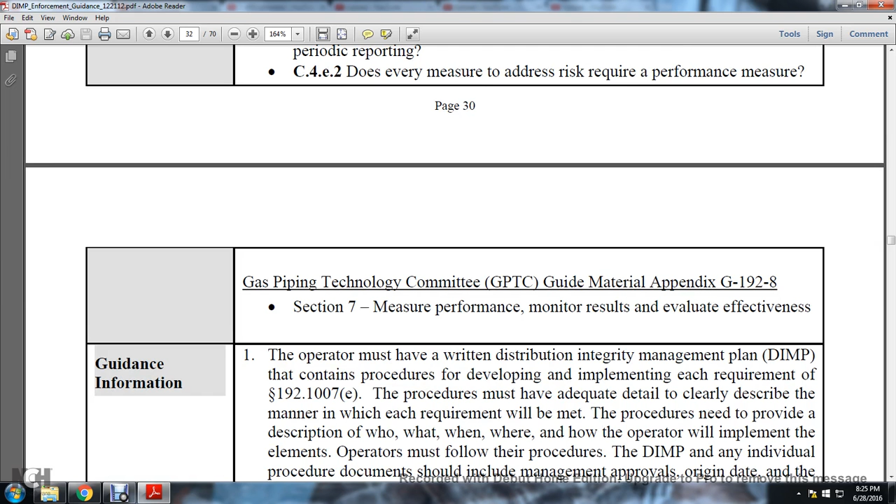Guideline: the Gas Piping Technology Committee, the GPTC Guide Material, Appendix G, 192.8, Section 7: measure performance and monitoring results, evaluate effectiveness.

Guidance information: the operator must have a written distribution integrity management plan that contains procedures for developing and implementing each of the requirements under Statute 192.1007E. The procedure must adequately and clearly describe the manner in which each program requirement will be met.

The procedure must provide a description of who, what, when, where, and how the operator will implement the elements. The operator must follow the procedure of the Distribution Integrity Management Program, and individual procedure documents should include management approvals, origin, and the effective date of the last revision. For additional information, see the guidance section 192.1005.

An operator must have provisions for measuring the integrity management program's effectiveness. The documentation must identify that the measurements are to be reviewed and the frequency at which they are reviewed.

The operator must develop the monitoring of performance from the established baseline to evaluate the effectiveness of the integrity management program. The program documentation must include the process the operator used in establishing the baseline and measurement of each performance measure from which the evaluation of change is made.

The program documentation must specify the measurements to be taken and identify the specific dates the measures should be covered. The threat-specific measure will only apply to the operator who determined the measure is needed to reduce risk. If it is a new performance measure, the operator may have only one data point, and will collect more data in the future to evaluate the change.

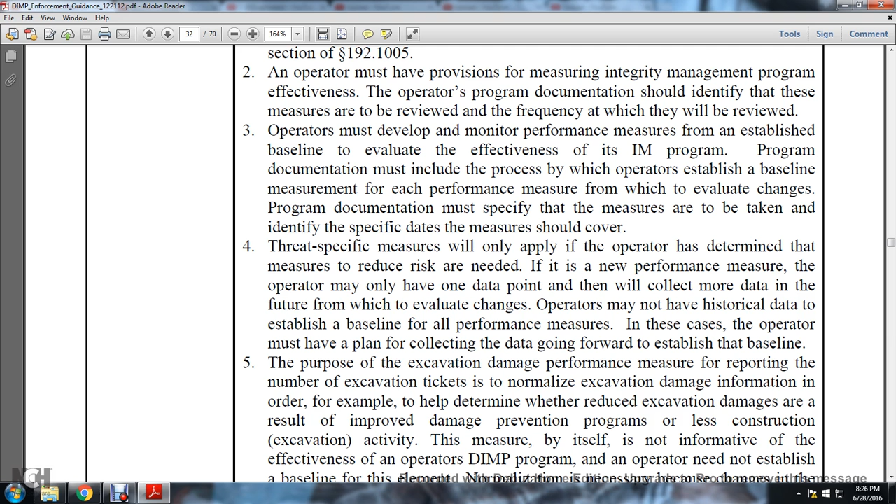The operator may not have historical data to establish the baseline for all performance measures. In those cases, the operator must have a plan for collecting data going forward to establish the baseline.

The purpose of the excavation damage performance measure is the reporting of the number of excavation tickets, in order to normalize the excavation damage information, for example to help determine whether reduced excavation damages are the result of improved damage prevention programs or less construction excavation activity.

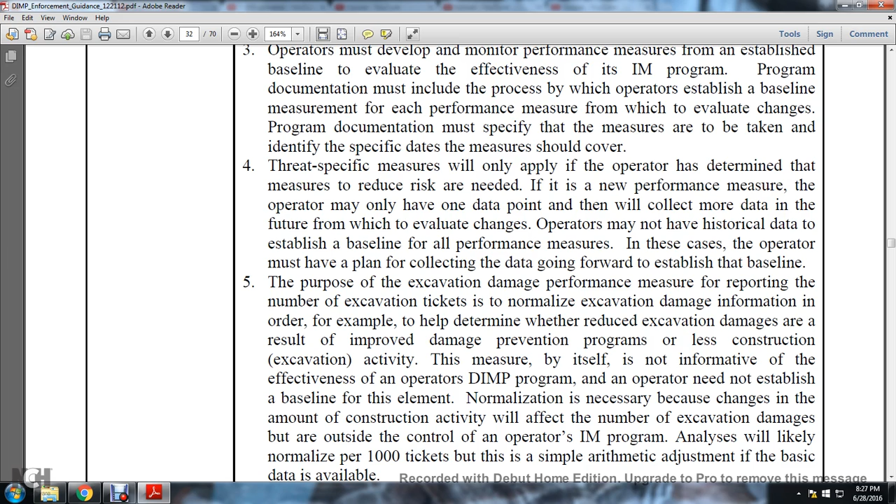The measure by itself is not informative of the effectiveness of the operator's distribution integrity management program, so an operator may not need to establish a baseline for this element. Normalization is necessary because changes in the amount of construction activity will affect the number of excavation damages, but this is outside the control of the operator's integrity management program. Analyses are likely to normalize per 1,000 tickets, but simple arithmetic adjustment is possible if the basic data is available.

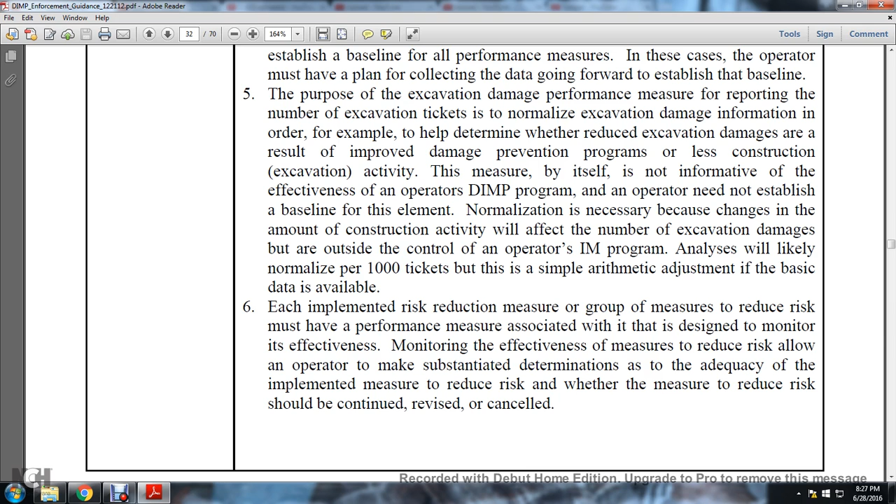Each implemented risk reduction measurement or group of measurements to reduce the risk must have a performance measure associated with it, designed for monitoring its effectiveness. Monitoring the effectiveness of the measure to reduce the risk allows the operator to make substantiated determinations as to adequacy, and whether the measures to reduce the risk shall be continued, revised, or canceled.

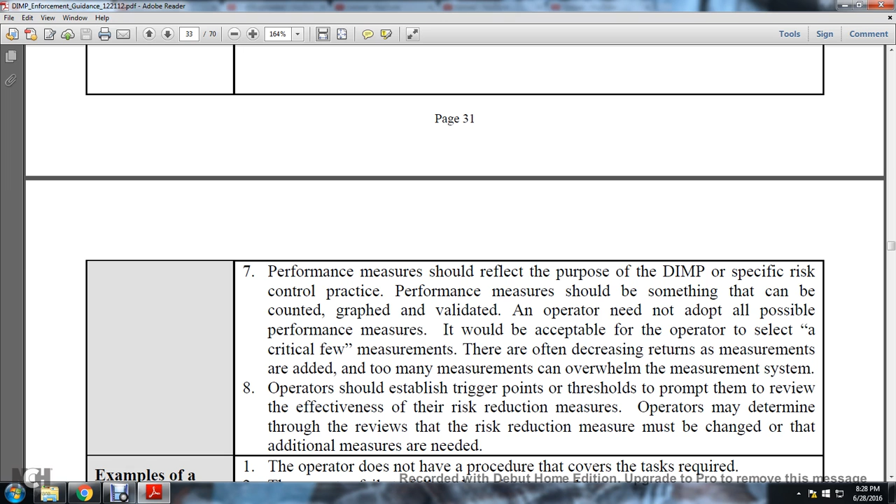Performance measures should be reflective of the purpose of the distribution integrity management program. Specific risk control practice measurements of performance should be something that can be counted, graphed, and validated. The operator need not adopt all possible performance measures; it would be acceptable for the operator to select a critical few measurements, since adding too many measurements leads to decreasing returns and can overwhelm the measurement system.

Operators should establish a trigger point or threshold to prompt review of the effectiveness of their risk reduction measurements. The operator may determine through these reviews that the risk reduction measurement should be changed, or that additional measurements are needed and are changed accordingly.

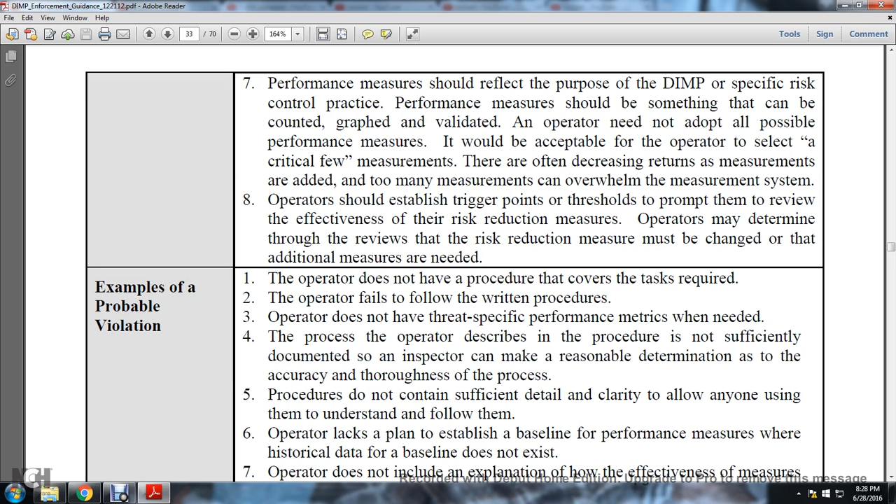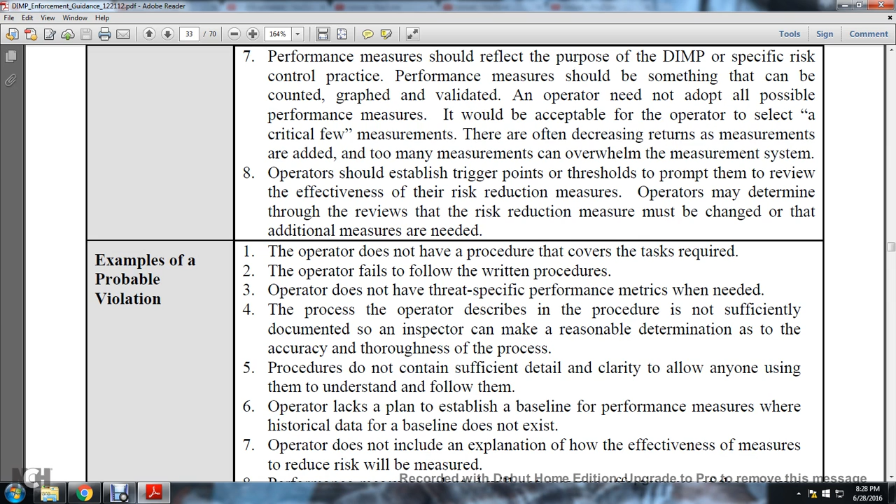Examples of probable violations: the operator does not have a procedure that covers the required task; the operator fails to follow the written procedure; the operator does not have specific performance metrics that were needed; the operator's process to describe the procedure is not sufficiently documented so that the inspector can make a reasonable determination as to the accuracy and thoroughness of the process; procedures do not contain sufficient detail or clarity to allow anyone using them to understand and follow them.

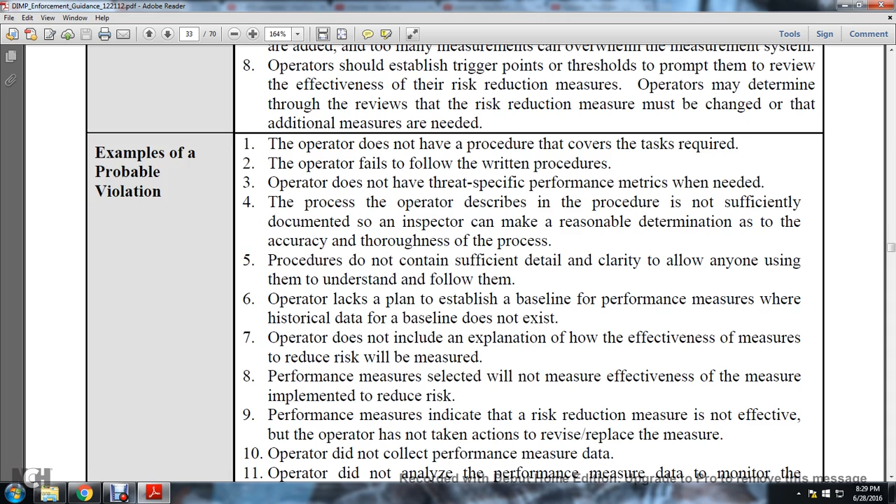The operator lacks a plan to establish baseline performance measures where historical baseline data does not exist. The operator does not include an explanation of how the effectiveness of the risk reduction measure will be measured. The performance measure selected does not measure the effectiveness of the implemented risk reduction measure.

The performance measure indicates the risk reduction measure is not effective, but the operator has not taken action to revise or replace the measures.

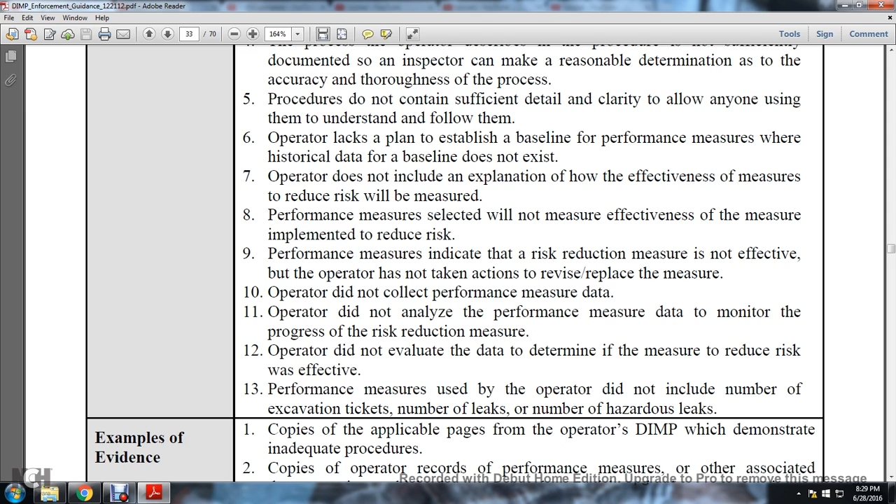The operator did not collect performance measure data. The operator did not analyze the performance measure data to monitor the progress of the risk reduction system or measure. The operator did not evaluate the data to determine whether the risk reduction measure was effective. The performance measures used by the operator did not include the number of excavation tickets, number of leaks, and number of hazardous leaks.

Examples of evidence: copies of the applicable pages of the operator's distribution integrity management program that demonstrate the inadequate process; copies of the operator's records of performance measures and associated documentation demonstrating that the risk reduction measure is not effective; copies of operator reports, performance measures, and other associated documentation demonstrating the risk reduction measure is not effective, and that corrective actions have not been taken, documented, or demonstrated - meaning the operator did not collect and evaluate the performance measure data.

Documented photographic evidence demonstrating the violation, along with oral and written statements from operator personnel; other special notations are not so far available.

Distribution Integrity Management, 192, December 21st, 2012, section 192-1007F. What are the required elements of the integrity management program? When a written integrity management plan exists, the code language requires it to contain procedures for developing and implementing the following elements.

F. Periodic evaluation: the operator reevaluates the threats and risks to the entire pipeline, considering the relevance of threats from one location to another. Each operator must determine the appropriate period for conducting complete program evaluations based on the complexity of the system, changes, and factors affecting the risk of failure. The operator must conduct a complete program reevaluation at least every 5 years and must consider the results of performance monitoring in these evaluations.

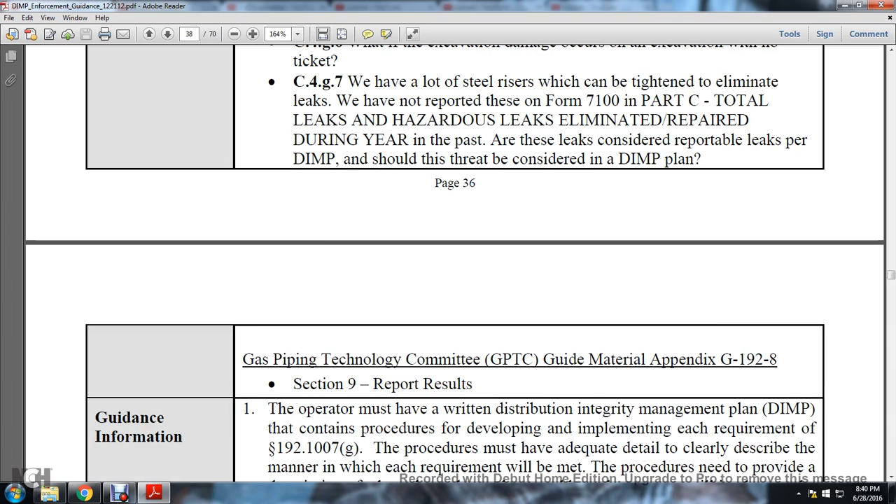Other materials and sources: Gas Piping Technology Committee, Guide Appendix G 192-8, Section 9, Report Results.

The operator must have a written distribution integrity management plan that contains the procedure for developing and implementing the requirement for Statute 192-1007G. The procedure must have adequate detail to clearly describe the manner in which the requirement will be met.

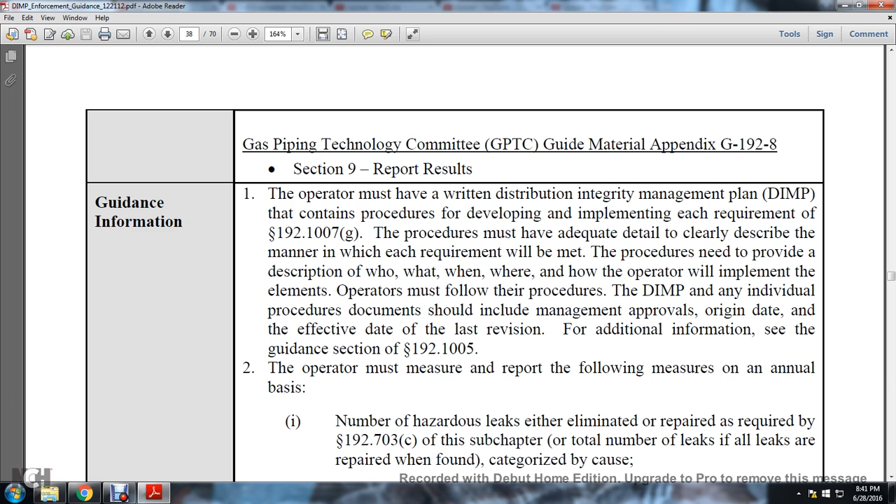The procedure needs to provide a description of who, what, when, where, and how the operator will implement the elements. The operator must follow the procedure. The distribution management program and individual procedures documented should include management approval, the origin date, the effective date of the last revision, and additional information. See the guidance in Section 192-1005.

The operator must measure and report the following measures on an annual basis: one, the number of hazard leaks either eliminated or repaired as required by 192.703C of the subchapter. Total number of leaks, if all leaks are repaired when found, categorized by cause.

Two, number of excavation damages. Three, number of excavation tickets, receipts, and information by the underground facility operator with a notification center. Four, the total numbers of leaks eliminated and repaired, categorized by cause.

Three, evidence that the appropriate regulatory authority has been notified in accordance with the various requirements of the rule must be obtained by the operator. The method of notification should be apparent. The use of electronic notification is preferred, and such electronic records are acceptable.

Examples of probable violation: the operator does not have a procedure that covers the task being performed. The operator fails to follow the written procedure. The operator did not submit the required performance measures. Four, the operator's procedure did not include all measures specified by the rule. The operator failed to submit the required report on an annual basis pursuant to Statute 191-11.

Examples of evidence: a copy of the operator's procedure showing that it does not meet the specified requirements, documented photographic evidence demonstrating the violation described, and documented oral and written statements from the operator's personnel demonstrating that the required reporting was not performed in a timely manner. Other special notifications not so revised.

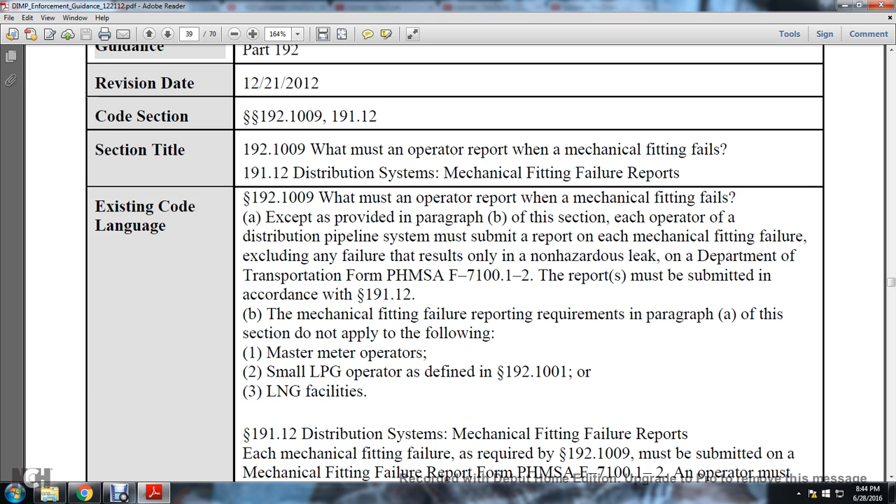191-12. The mechanical fitting failures reporting requirements of paragraph A of this section do not apply to the following: master meter operators, small liquefied petroleum gas operators as defined in statute 192-1001, and liquefied natural gas facilities.

192 or 191-12, distribution system mechanical fitting failure reports. Each mechanical fitting failure as required in statute 192-1009 must be submitted on the mechanical fitting failure form, the PHMSA F7100 1 and 2. The operator must submit a mechanical fitting failure report for each of...

...the mechanical fitting failures that occur within the calendar year, not later than March 15th of the following year. For example, the mechanical failure report for calendar year 2011 must be submitted no later than March 15, 2012. Alternatively, the operator may elect to submit the report throughout the year.

In addition, the operator must also report the information to the state pipeline safety authority and the state obtained with regulatory authority over the operator's pipeline.

Origin of code 192.116, 76 FR 5494, February 1st, 2011. The origin of the code is the same as the last amended. Interpretation summary is not available.

Advisory bulletin alert, notice of an alert. The advisory bulletin 1207 issued June 11, 2012. The Pipeline and Hazardous Materials Safety Administration is issuing an advisory bulletin to provide clarification to owners and operators of gas distribution pipeline facilities when complying with the mechanical fitting failure form, the PHMSA F7100.1-2.

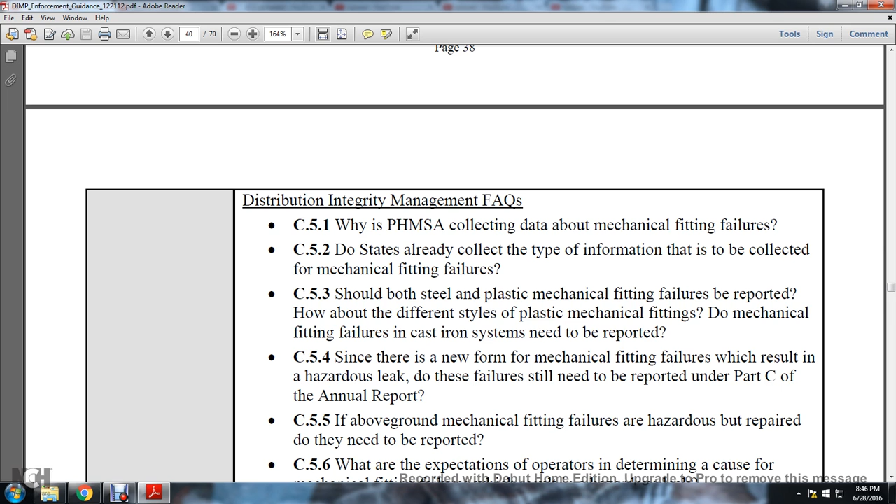Distribution Integrity Management, frequently asked questions. C51: Why is PHMSA collecting data about mechanical fitting failures? C52: Does the state already collect the type of information to be collected about mechanical fitting failures? C53: Should both steel and plastic mechanical fitting failures be reported? The different styles of plastic mechanical fittings, and mechanical fitting failures in cast iron systems, need to be reported.

C54: Since there is a new form for mechanical fitting failures which result in hazardous leaks, does the failure still need to be reported in Part C of the annual report? If the above ground fitting failures are hazardous but repaired, do they need to be reported. For C56: What are the expectations of operators in determining the cause of a mechanical fitting failure which results in a hazardous leak.

Guidance information: operators must submit a mechanical fitting failure report on the PHMSA F7100 1 and 2 for each mechanical fitting failure which results in a hazardous leak. Mechanical fitting failures which result in a hazardous leak may be submitted throughout the year, or at one time, prior to March 15th of the following calendar year.

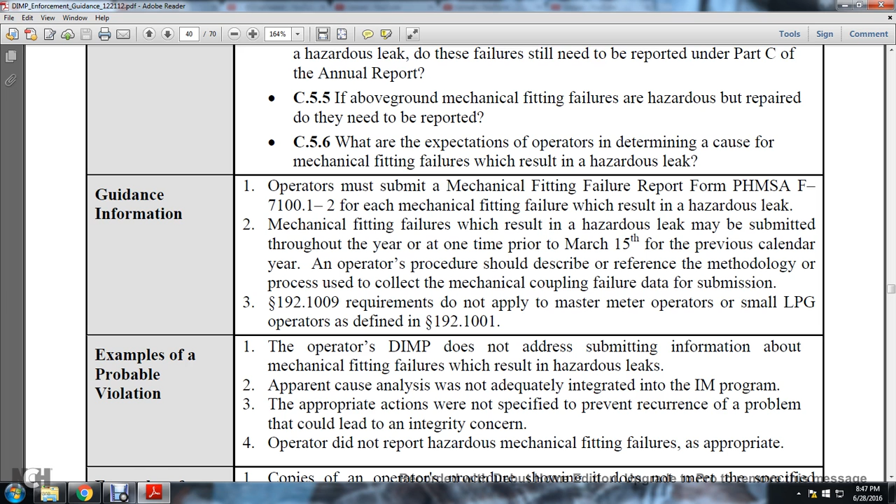An operator's procedure should describe the methodology and process used to collect the mechanical coupling failure data and submission. §192.1009 requirements do not apply to master meters and small liquid petroleum gas operators as defined in §192.1001.

Example of probable violation: the operator's distribution integrity management program does not address submitting information on mechanical fitting failures which result in a hazardous leak. The apparent cause analysis was not adequately integrated with the integrity management program. Appropriate actions were not specified to prevent reoccurrence of the problem that could lead to an integrity concern. The operator did not report hazardous mechanical fitting failures as a result, or as appropriate.

Examples of evidence: copies of operator procedures showing that they do not meet the specified requirements; documented photographic evidence demonstrating the violation; documented oral or written statements from operating personnel; records identifying mechanical fitting failures resulting in hazardous leaks that were not included in the report or reporting performed by the operator; and other specific notifications.

Enforcement guidelines, distribution integrity management, Part 192, revision date December 21st, 2012, code section.

192.1011, section title: What are the records of the operator or keeper? Existing code: an operator must maintain records demonstrating compliance with the requirements of the subpart for at least 10 years. The record must include copies of the superseded integrity management programs developed under the subpart.

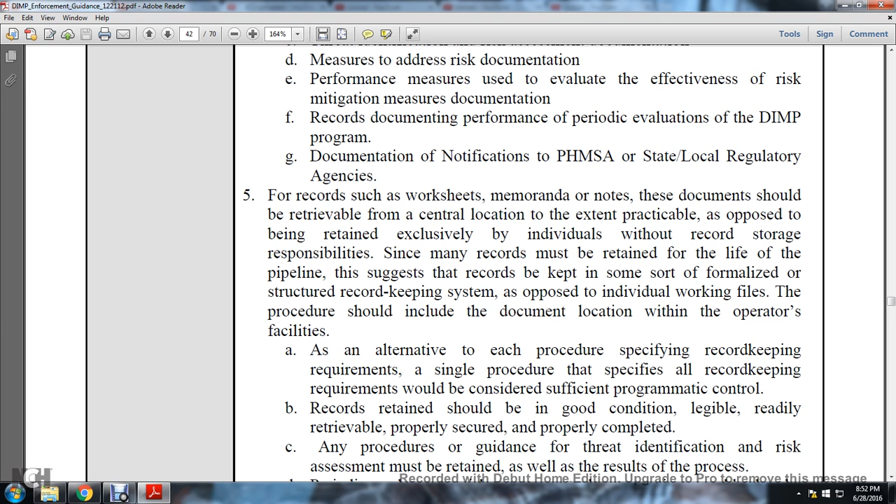The suggested record should be kept in some sort of formalized or structured record keeping system, as opposed to individual working files. As an alternative, each set of procedures specifying record keeping requirements, or a single procedure specifying all record keeping requirements, is considered sufficient programmatic control. B: records retained should be in good condition, legible, readable, retrievable, properly secured, and properly completed.

C: any procedures and guidance for threat identification and risk assessment must be retained, as well as the results of the process.

Periodic updates of the risk assessment documentation would be expected in the program files, including supporting records such as meeting minutes and subject matter expert reviews where conclusions are drawn.

The rule does not require documentation of the decision analysis process developed to evaluate each element, but maintaining the integrity management program elements is useful.

The set of documents should include those developed in support of identification, calculation, amendment, notification, justification, deviation determination, and any action implementing and evaluating the program elements.

Example of probable violation: procedures do not require that all required records be retained with the 10-year minimum requirement. The operator does not have the procedure specifying that copies superseded with the integrity management plans will be maintained for at least 10 years.

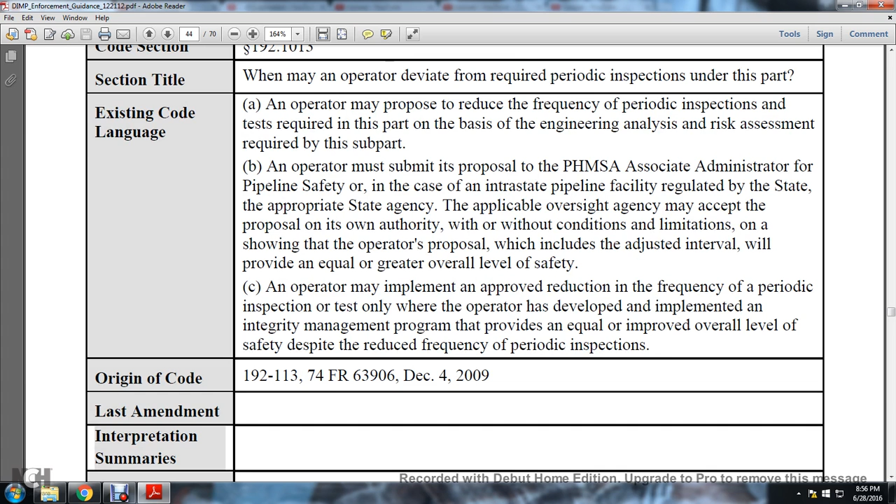An operator may implement an approved reduction in frequency of periodic inspection tests only when the operator has developed and implemented an integrity management program that provides an equal or improved overall level of safety despite the reduced frequency of periodic inspection.

Original code 192.113, 74 FR 63906, December 4th, 2009. Last amendment not foreseeable and not done.

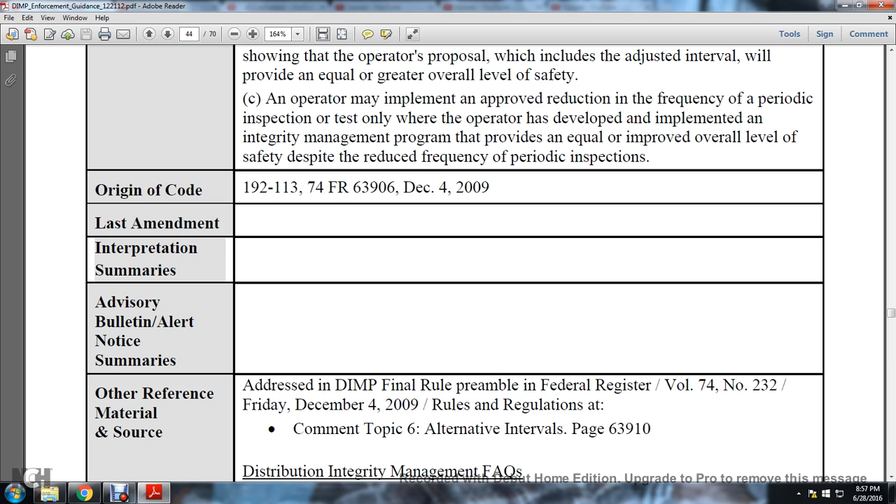The interpretation summaries, notice, advisory bulletin, or notice summaries are blank. Other reference materials addressing the Distribution Integrity Management final rule and preamble: Federal Register Volume 74, Number 232, Friday December 4th, 2009, rules and regulations, comment topic 6, alternative intervals.

Page 63910. Distribution Integrity Management frequently asked questions. C.7.1: how can an operator use the distribution integrity management program to justify reductions of periodic test inspection requirements? C.7.2: when does PHMSA (or States) require a proposal for alternate inspection intervals?

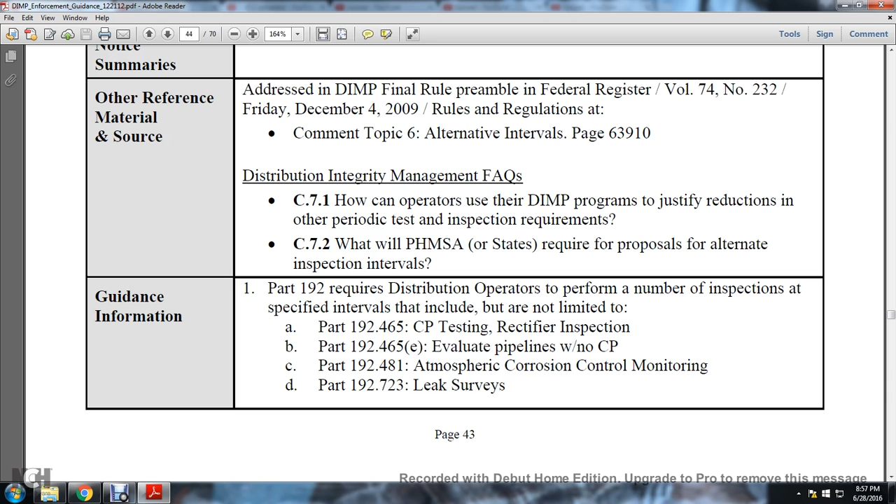Guidance information: Part 192 requires distribution operators to perform a number of inspections at specified intervals, including but not limited to Part 192.465 CP testing and rectifier inspection, 192.465E evaluated pipelines with no CP, 192.481 atmospheric corrosion control monitoring, 192.723 leak surveys, Part 192.739 pressure limiting device testing, 192.747 emergency valve testing, 192.749 vault inspection, and 192.721 main patrolling.

Through the fundamental premise of risk management, reallocation of resources for activities with lesser effect on risk can allow greater impact where needed. The intervals specified for required inspection in Part 192 are not strictly risk-impact based; they were based on judgment and experience. An operator's risk assessment may show some inspections have little effect on reducing risk, while the resources used could be redirected to other activities that significantly impact risk reduction. The regulation allows this type of resource reallocation to occur.

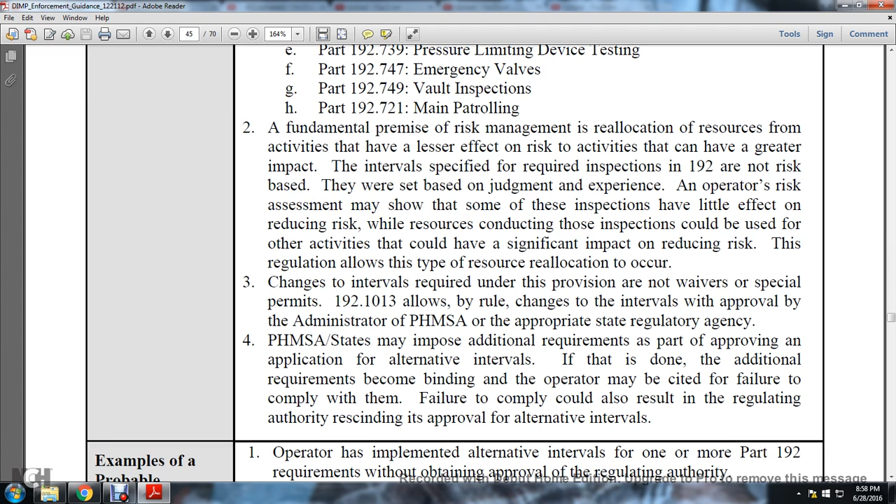2,3: the change in intervals required under the provision is not waivers or special permits. 192.1013 allows operators to change intervals with approval of the Pipeline and Hazardous Materials Safety Administration or the appropriate state regulatory agency.

The Pipeline and Hazardous Materials Safety Administration or states may issue additional requirements as part of approving an application for alternative intervals. If done, these additional requirements become binding, and the operator may be cited for failure to comply with them. Failure to comply could also result in the regulating authority rescinding approval of alternative intervals.

Examples of probable violation: the operator implemented alternative intervals for one or more of the Part 192 interval requirements without obtaining approval from the regulating authority. The operator is conducting required inspections at an interval that differs from the alternative interval approved by the regulating authority.

Examples of probable violation, continued: the operator is not complying with additional requirements imposed by the regulating authority as part of the approval of alternative intervals. The regulating authority has rescinded approval for the alternative intervals, and the operator has not modified its procedures and practices to return to the intervals specified in Part 192.

Examples of evidence: a copy of the letter from the regulating authority approving alternative intervals, or lack thereof. A copy of the procedure specifying different alternative intervals to the approved regulating authority. Records indicating inspections conducted with intervals greater than the alternative approved by the regulating authority. Absence or insufficient records demonstrating the operator cannot produce documentation showing compliance. Documented photographic evidence demonstrating the violation, documented oral and written statements from operating personnel, and other specifications not so far noted.

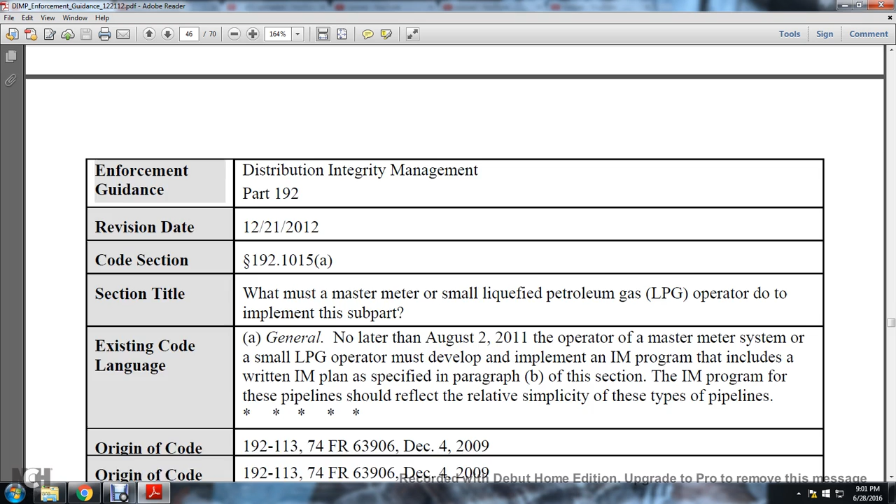Origin of code: 192-113, 74 FR 63906, December 4th, 2009. Last amendments and interpretations: summaries, advisory bulletins, and alerts are blank. Other resource materials addressing the distribution integrity management program final rule are found in the Federal Register 74, number 232, Friday, December 4th, 2009, rules and regulations, comment topic 7, integrity management records, master meters, liquefied petroleum gas operators, on page 63912, and comment topic 11, required documentation, page 63915.

Distribution integrity management program federal frequently asked questions: B41, what is a simple, handy, risk-based integrity management plan? B42, is there a threshold size of the operator's distribution system above which the simple handy tool should not be used for a simple, handy, risk-based integrity management program? B43, will my plan be compliant using the simple handy risk-based integrity management program?

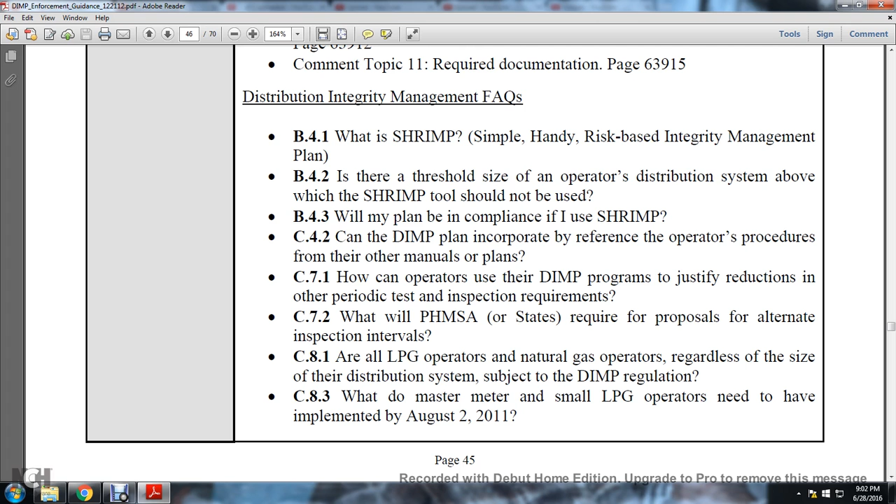C42, can a distribution integrity management plan incorporate by reference the operator's other procedures, manuals, and plans? C71, can an operator use the distribution integrity management program to justify reductions to the periodic test and inspection requirements? C72, what will the Pipeline and Hazardous Materials Safety Administration require for the approval of alternative inspection intervals?

C81, all liquefied petroleum gas operators and natural gas operators regardless of the size of their distribution system are subject to the distribution integrity management program regulations. What do master meter and small liquefied petroleum gas operators need to have implemented by August 2011?

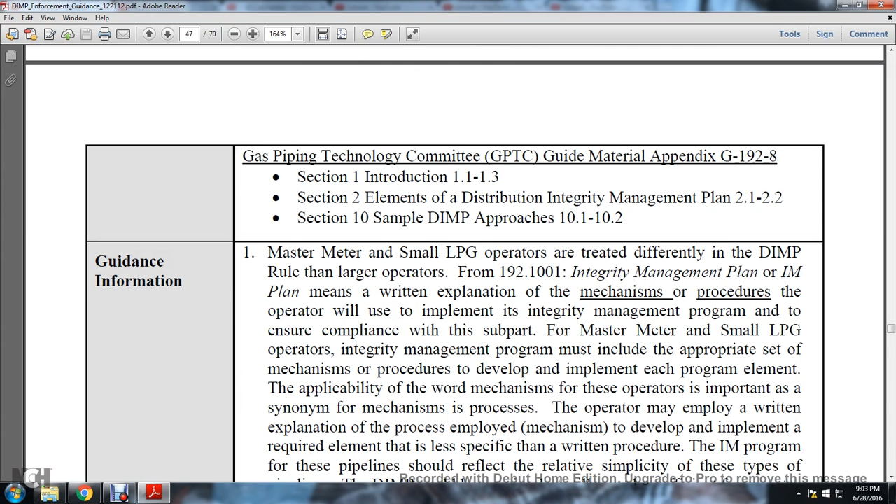Gas Piping Technology Committee, or GPTC, guide material appendix G, part 192: Section 1, Introduction, 1.1 through 1.3; Section 2, Elements of a Distribution Integrity Management Plan, 2.1 and 2.2; Section 10, Sample Distribution Integrity Management Program Approaches, 10.1 and 10.2.

Guidance information: master meter and small liquefied petroleum gas operators are treated differently in the distribution integrity management program rule than large operators. Per statute 192.1001, integrity management program plans require a written explanation of the mechanisms and procedures operators will use to implement the integrity management program and ensure compliance. The program for master meter and small liquefied petroleum gas operators must include an appropriate set of mechanisms and procedures developed and implemented for each program element.

The application of the word 'mechanism' for the operator is important, as a synonym for mechanism is process. The operator may employ a written explanation of the process used as the mechanism to develop and implement the required element, rather than a more specific written procedure.

The integrity management program for the pipeline should reflect the relative simplicity of these types of pipelines. Distribution integrity management can be concise, but must still be sufficient for the operator's personnel to understand and implement the program on a consistent basis.

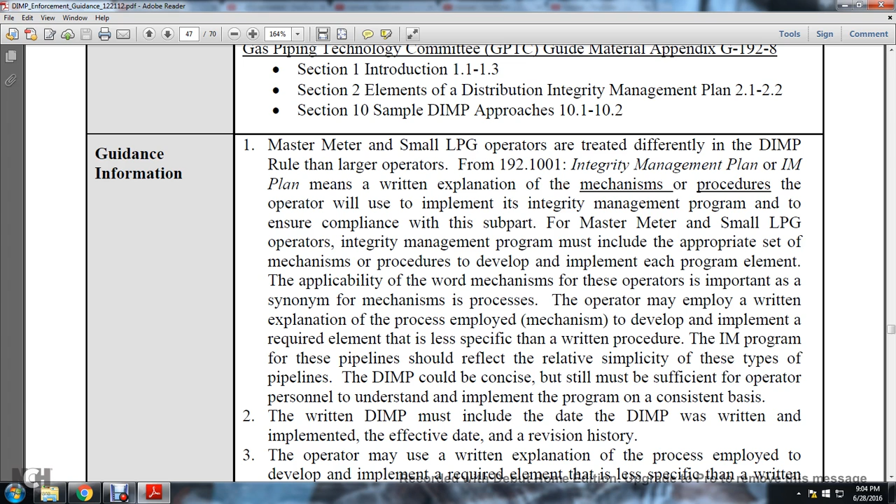The written distribution integrity management program must include the date the program was written and implemented, along with the effective date and revision history.

The operator may use a written explanation of the process employed to develop and implement the required element, rather than a more specific written procedure. Many operators use commercially available products to develop their distribution integrity management program.

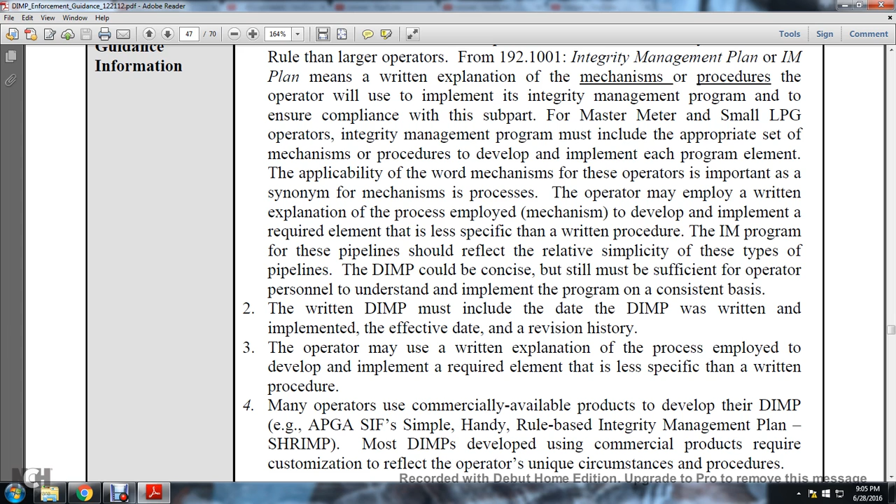Examples include APGA SIF's SHRIMP, the Simple Handy Risk-based Integrity Management Plan. Most distribution integrity management programs developed using commercial products require customization to reflect the operator's unique circumstances and procedures. There is also guidance specific to an operator who transfers a pipeline to another operator but retains responsibility for contract maintenance and distribution integrity management activities.

Which operator is accountable for implementing the distribution integrity management program? The state inspector ensures operator compliance with the pipeline safety regulations, and operators are defined in Title 49 CFR.

192-3: the person who engages in the transportation of gas. The person is further defined as an individual, firm, joint venture, partnership, corporation, association, state, municipality, cooperative association, joint stock association, including trustee, receiver, assignee, or personal representative thereof. If an operator retains responsibility for operation and maintenance activities, including integrity management, the operator must comply with the distribution integrity management program.

Example of a probable violation: the operator does not have the distribution integrity management program written and implemented as of August 2011. The operator does not address the liquefied petroleum gas or other type of gas transported with the applicable program.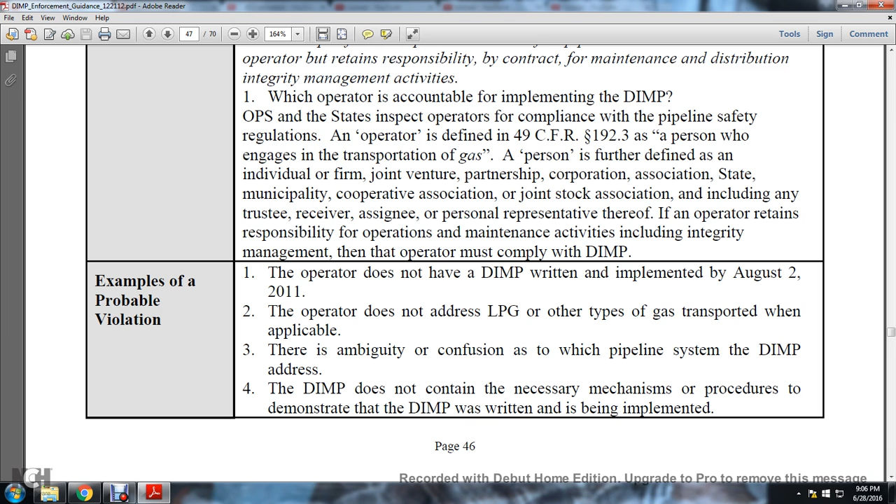Third, there is ambiguity and confusion as to the type of pipeline system the distribution integrity management program addresses. The program does not contain the necessary mechanisms and procedures to demonstrate that the written distribution integrity management program is implemented. Fifth, the distribution integrity management does not include all pipelines and appurtenances.

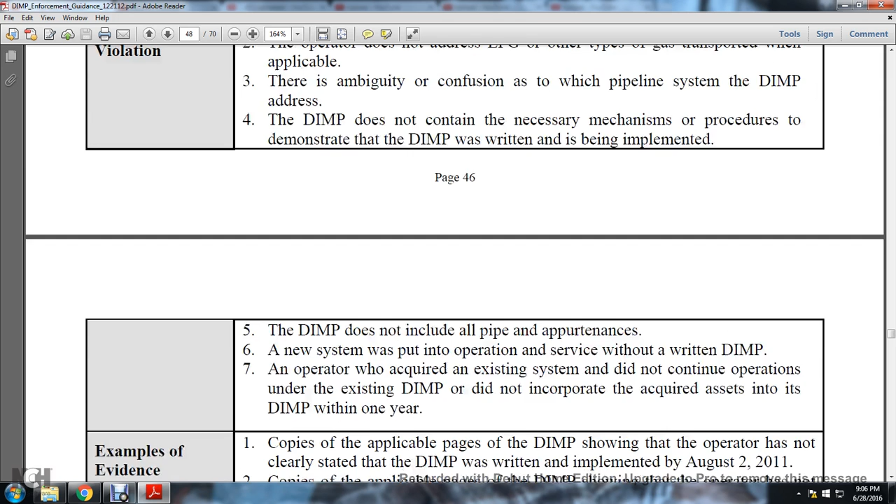Probable violation six: a new system was put into operation service without a written distribution integrity management program. Seventh, an operator who acquired an existing system did not continue operations under the existing distribution integrity management program, or did not incorporate the acquired assets into the distribution integrity management program within one year.

Examples of evidence: copies of applicable pages of the DIMP showing the operator has not clearly stated the distribution integrity management program was written and implemented as of August 2nd, 2011. Copies of applicable pages of the distribution integrity management program showing the operator has not clearly stated the type of gas transported.

Third, copies of applicable pages of the distribution integrity management program showing the operator has not clearly stated what system the distribution integrity management covers. Documented photographic evidence demonstrating the violation. Documented oral or written statements from the operator personnel. Other special notifications noted.

Enforcement guidance, distribution integrity management, Part 192, December 21st, 2012, 192.1015(b)(1). Section title 192.1015: what must a master meter or small liquefied petroleum gas operator do to implement the subpart? The existing written integrity management plan must address, at minimum, the following elements.

One, knowledge: the operator must demonstrate knowledge of his pipeline, which, to the extent known, should include the approximate location and material of the pipeline. The operator must identify additional information needed and provide a plan for gaining knowledge over time through normal activities conducted on the pipeline, for example design, construction, operation, and maintenance activities.

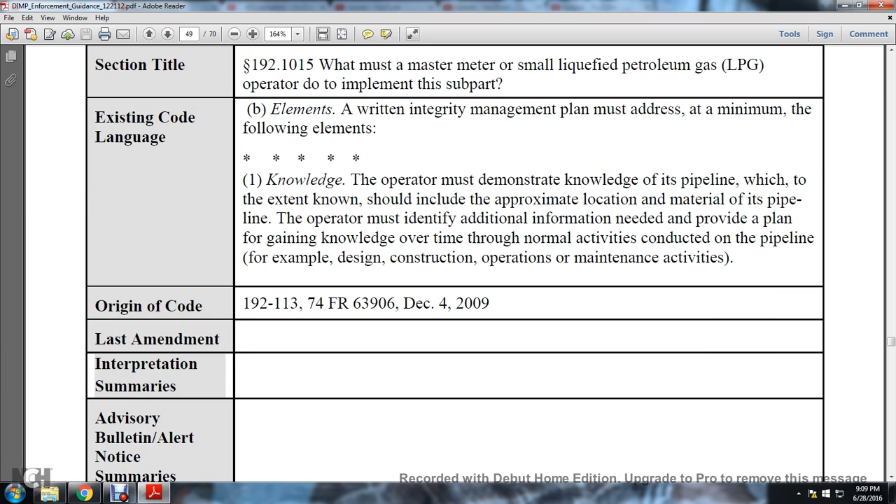The originating code is 192.113, 74 Federal Register 63906, December 4th, 2009. Last amendment interpretation summaries, advisory bulletin, alerts, and summaries. Other materials and sources addressed in the distribution integrity management final ruling preamble, Federal Register volume 74, number 232, Friday, December 4th, 2009, rules and regulations, comment topic 20: knowledge of the pipeline, enforcement factors on page 63919.

Distribution integrity management frequently asked questions. C4A1: the rule requires the operator to know the system, but must an operator excavate simply to gather information on parts of the system where it may not have complete knowledge? C4A2: there are some characteristics of an operator's system that may not be known during development of an integrity management plan. What are the Pipeline and Hazardous Materials Safety Administration's expectations for filling those voids?

C4A3: what is a qualified subject matter expert? C4A4: what data is required to be collected for new gas pipelines going into the ground? C4A5: what comprises reasonable, reliable information? C4A6: most operating plans include the source for demonstrating and understanding the gas distribution system. The Gas Piping Technology Committee guide material, Appendix G-192-8, Section 3, knowledge.

Master meter and small liquefied petroleum gas operators are treated differently in the distribution integrity management program rule than large operators. From 192.1001, integrity management program: integrity management means a written explanation of mechanisms and procedures developed and implemented to ensure compliance with the subpart for master meters.

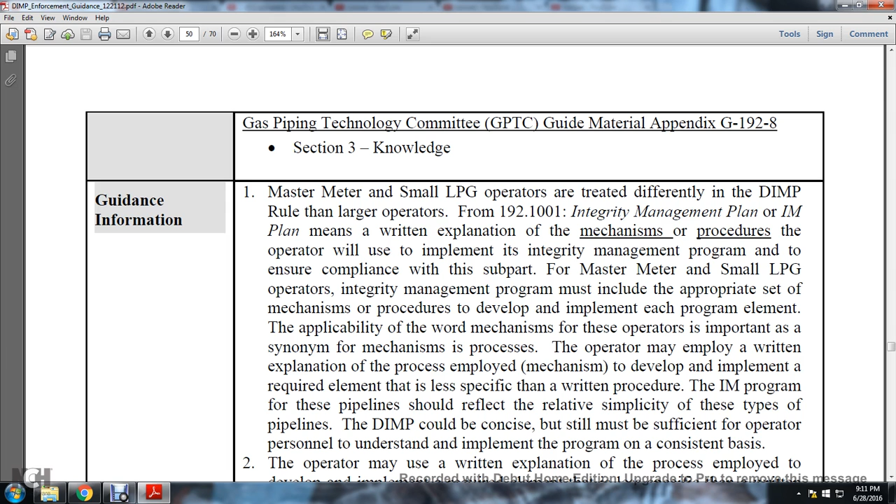The distribution integrity management program could be concise, but it must still be sufficient for the operator's personnel to understand and implement the program on a consistent basis.

The operator may use a written explanation process employed with developing and implementing the required element that is less specific than a written procedure.

An operator must have knowledge of the gas distribution system, including but not limited to: location, material composition, pipe size, joint method, construction method, date of installation, soil condition, and when appropriate, operating and design pressures, history, operating experience, performance data, condition of system, and any other characteristic relevant to operation.

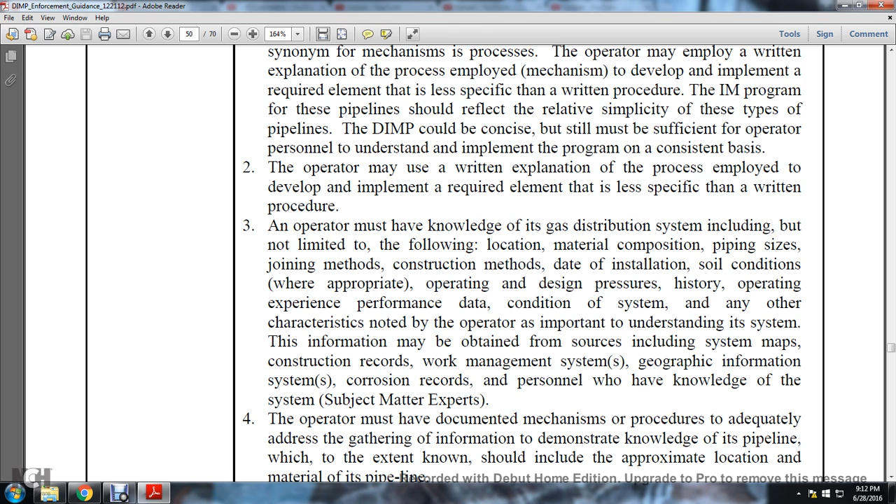Understanding the system is important. This information may be attained from sources including system maps, construction records, work management systems, geographical information systems, corrosion records, and personnel who have knowledge of the system, such as subject matter experts.

The operator must have a documented mechanism or procedure to address gathering information demonstrating knowledge of the pipeline, which to the extent known should include the approximate location and material of the pipeline.

The operator must identify the additional information needed, with a plan to gain that knowledge over time through normal activities conducted on the pipeline, for example design, construction, operation, and maintenance activities.

The Distribution Integrity Management Program must list the names of the operator's specific information sources, not generic terms such as O&M documents. Some historical data may no longer be applicable to the current condition of the pipeline.

It may be replaced with new data if the prior data is no longer relevant. Such data must be relevant to the circumstances: construction practices, coating, backfill materials, pipe materials, and environmental conditions of the pipe prior to replacement, to the extent relevant to the existing risk of the operating system.

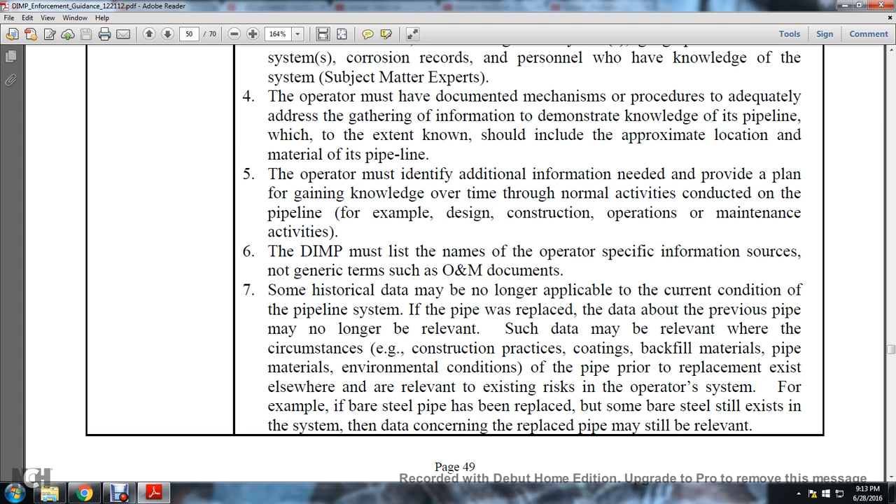For example, if bare steel has been replaced but some bare steel still exists, the data concerning the replaced pipe may still be relevant.

Operators transporting gases other than natural gas need to state in the Distribution Integrity Management Program the class of gas, its impact, the threats and risks, and include the differences from natural gas.

For the data identified, the operator needs, in the threat identification and risk evaluation process, to identify facilities where records are missing, inaccurate, or incomplete.

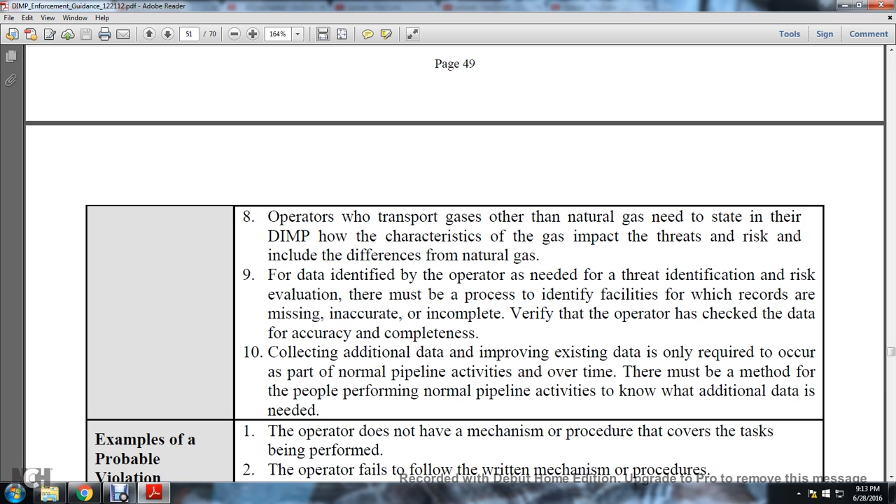Verify that the operator checks the data for completeness.

Technically, collecting additional data and improving existing data is required to occur through normal pipeline activities over time. There must be a method for the people performing normal pipeline activities to determine when additional data is needed.

Examples of probable violations: one, the operator does not have a mechanism or procedure for the task being performed. Two, the operator fails to follow the written mechanisms or procedures.

Three, the operator demonstrates that they have local and available sources to find information on past design, operation, and maintenance, such as coating and material, but does not use them.

Four, the operator does not specifically list or document the use of assembled knowledge in the system. Five, the operator does not use reasonable data for the entire pipeline that could be relevant in performing threat assessment and risk evaluation as needed for the group of facilities.

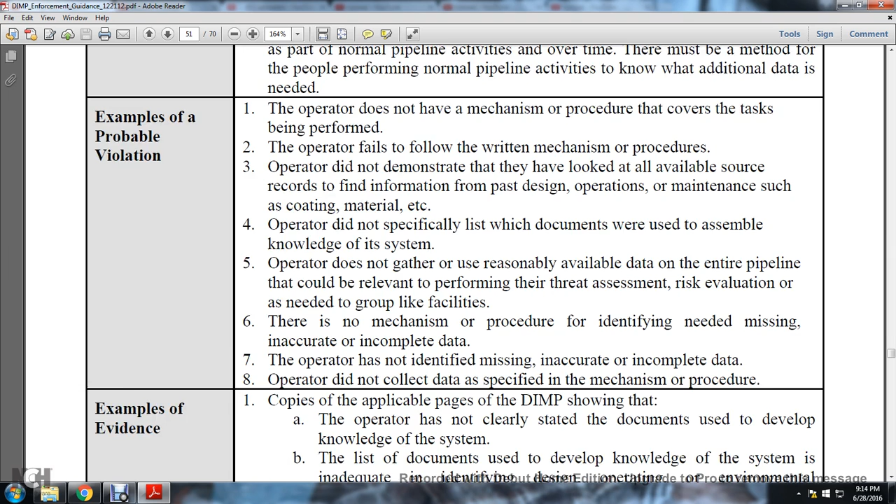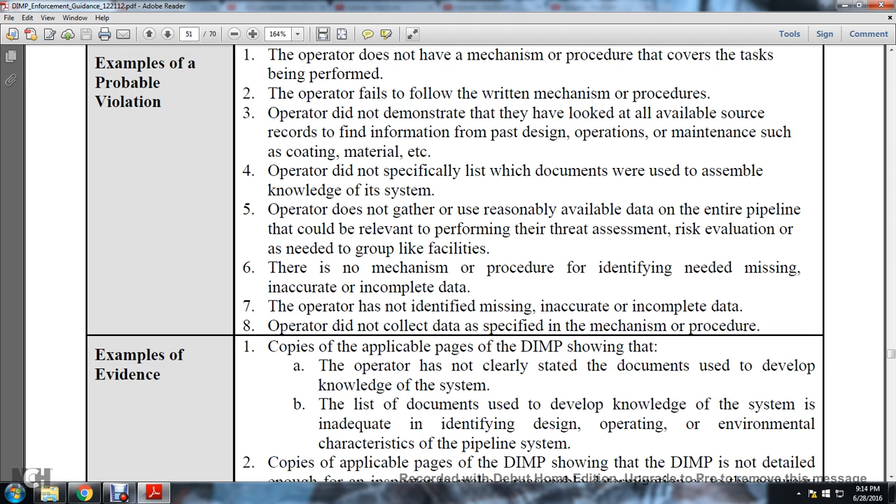Six, there is no mechanism or procedure to identify missing, inaccurate, or incomplete data, and the operator has not identified missing, inaccurate, or incomplete data.

Eight, the operator did not collect data as specified in the mechanisms or procedures. Eight.

Examples of evidence: copies of the applicable pages of the Distribution Integrity Management Plan should be reviewed. The operator has not clearly stated the documents used to develop knowledge of the system. The list of documents used to develop knowledge of the system is inadequate in identifying the design, operating, and environmental characteristics of the pipeline system.

Two, the copies of the applicable pages of the Distribution Integrity Management showing the plan are not detailed enough for an inspector to make a reasonable determination as to the accuracy and thoroughness of the process.

Three, copies of the applicable pages of the operator's Distribution Integrity Management Program showing the records and regulatory provisions documented are insufficient to prove compliance with the integrity regulation provisions.

Four, copies of the applicable pages of the operator's Distribution Integrity Management Plan showing the required data collection or utilization of data are not in compliance with Distribution Integrity Management requirements.

Five, documented photographs as evidence demonstrating the violation. Six, documented oral or written statements from operator personnel. Other specifications not noted.